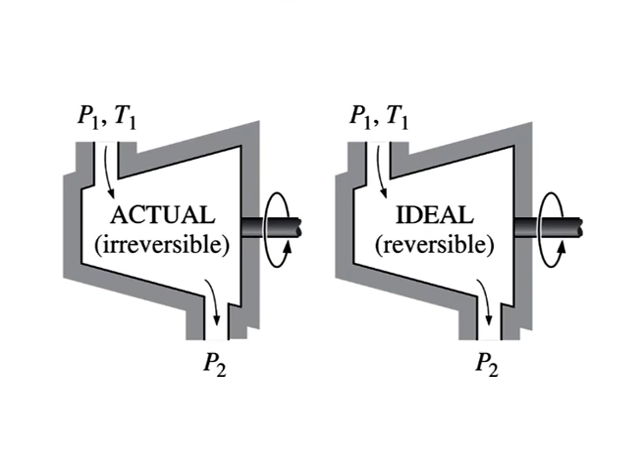Furthermore, an ideal process should involve no irreversibilities, since the effect of irreversibilities is always to downgrade the performance of engineering devices. Thus, the ideal process that can serve as a suitable model for adiabatic steady flow devices is the isentropic process. The more closely the actual process approximates the idealized isentropic process, the better the device performs.

Thus, it would be desirable to have a parameter that expresses quantitatively how efficiently an actual device approximates an idealized one. This parameter is the isentropic or adiabatic efficiency, which is a measure of the deviation of actual processes from the corresponding idealized ones. Isentropic efficiencies are defined differently for different devices, since each device is set up to perform different tasks.

Isentropic efficiency of turbines. For a turbine under steady operation, the inlet state of the working fluid and the exhaust pressure are fixed. Therefore, the ideal process for an adiabatic turbine is an isentropic process between the inlet state and the exhaust pressure. The desired output of a turbine is the work produced,

and the isentropic efficiency of a turbine is defined as the ratio of the actual work output of the turbine to the work output that would be achieved if the process between the inlet state and the exit pressure were isentropic, that is, eta T is equal to actual turbine work divided by isentropic turbine work, and is equal to W A upon W S.

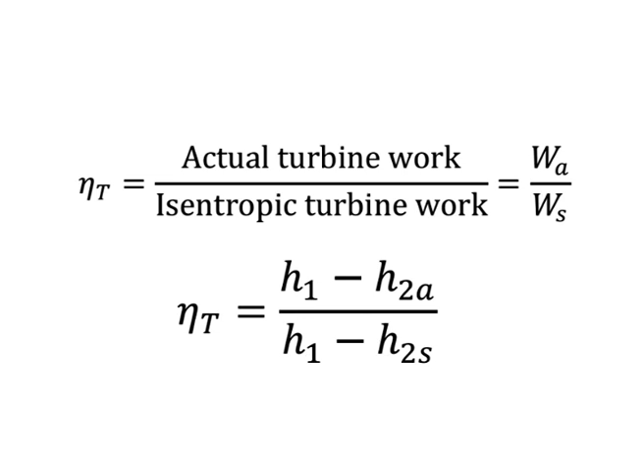The value of eta T greatly depends on the design of the individual components that make up the turbine. Well designed large turbines have isentropic efficiencies above 90%. For small turbines, however, it may drop even below 70%.

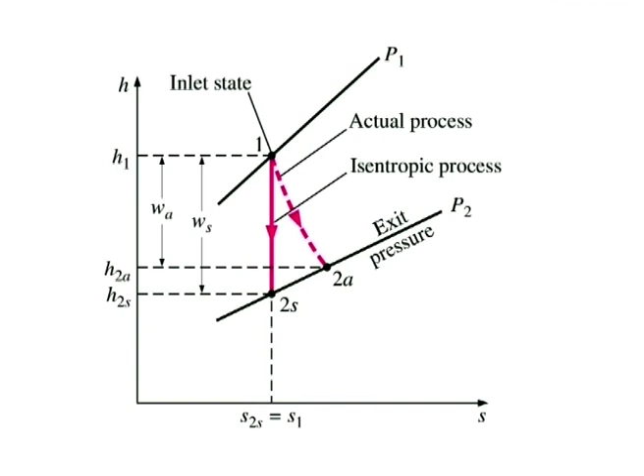The value of the isentropic efficiency of a turbine is determined by measuring the actual work output of the turbine and by calculating the isentropic work output for the measured inlet conditions and the exit pressure. This value can be used conveniently in the design of power plants.

Isentropic efficiencies of compressors and pumps. The isentropic efficiency of a compressor is defined as the ratio of the work input required to raise the pressure of a gas to a specified value in an isentropic manner to the actual work input, that is, eta C is equal to isentropic compressor work divided by actual compressor work, and is equal to Ws upon Wa.

Notice that the isentropic compressor efficiency is defined with the isentropic work input in the numerator instead of the denominator. This is because Ws is a smaller quantity than Wa, and this definition prevents eta C from becoming greater than 100%, which would falsely imply that the actual compressors performed better than the isentropic ones.

When the changes in kinetic and potential energies of the gas being compressed are negligible, the work input to an adiabatic compressor becomes equal to the change in enthalpy, and the above equation for this case becomes eta C is equal to H2S minus H1 divided by H2A minus H1.

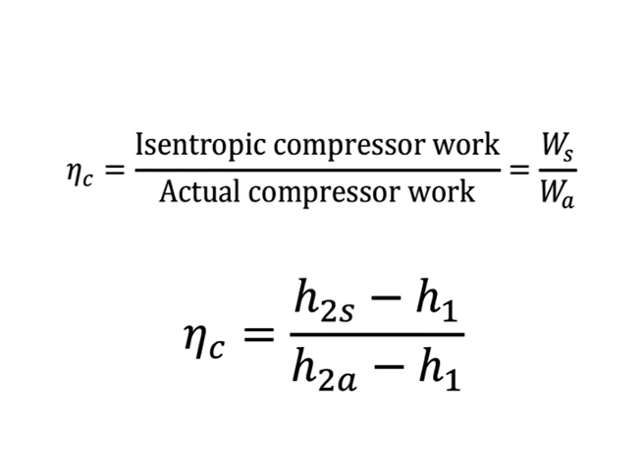Here H2A and H2S are the enthalpy values at the exit state for actual and isentropic compression processes respectively, as illustrated in this figure. The value of eta C greatly depends on the design of the compressor. Well designed compressors have isentropic efficiencies that range from 80 to 90%.

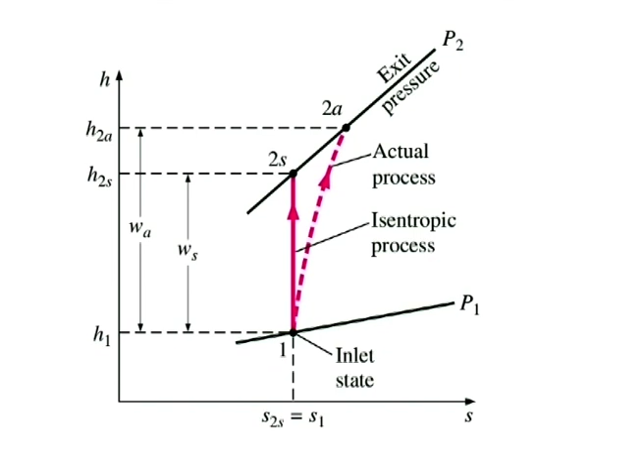When the changes in potential and kinetic energies of a liquid are negligible, the isentropic efficiency of a pump is defined similarly as eta C equals Ws upon Wa, equal to V times (P2 minus P1) divided by (H2A minus H1).

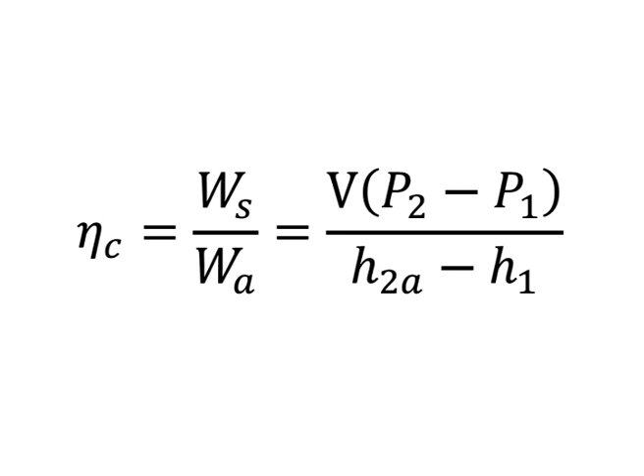When no attempt is made to cool the gas as it is compressed, the actual compression process is nearly adiabatic, and the reversible adiabatic, that is isentropic, process serves well as the ideal process. However, sometimes compressors are cooled intentionally using fins or water jackets around the casing to reduce work input requirements. In this case, the isentropic process is not suitable as a model, since the device is no longer adiabatic and the isentropic compressor efficiency as defined is meaningless.

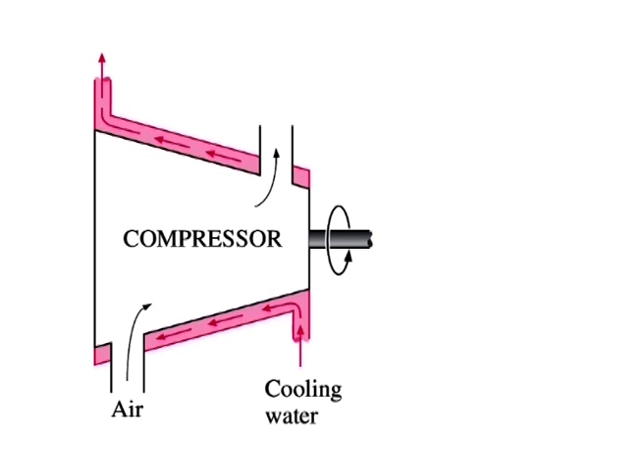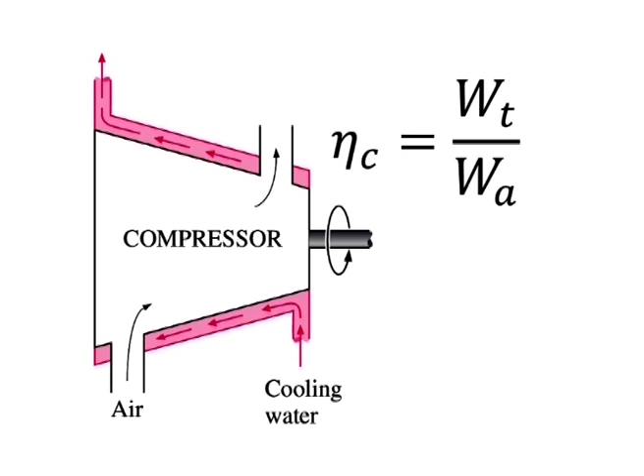A realistic model process for compressors that are intentionally cooled during compression is the reversible isothermal process. We can then conveniently define an isothermal efficiency for such cases by comparing the actual process to a reversible isothermal one, as eta C equals Wt upon Wa. Here Wt and Wa are the required work inputs to the compressor for the reversible isothermal and actual cases respectively.

Isentropic efficiency of nozzles. Nozzles are essentially adiabatic devices used to accelerate a fluid. Therefore, the isentropic process serves as a suitable model for nozzles.

The isentropic efficiency of a nozzle is defined as the ratio of the actual kinetic energy of the fluid at the nozzle exit to the kinetic energy value at the exit of an isentropic nozzle for the same inlet state and exit pressure. That is, eta n equals actual kinetic energy at nozzle exit divided by isentropic kinetic energy at nozzle exit, equal to V squared 2A divided by V squared 2S.

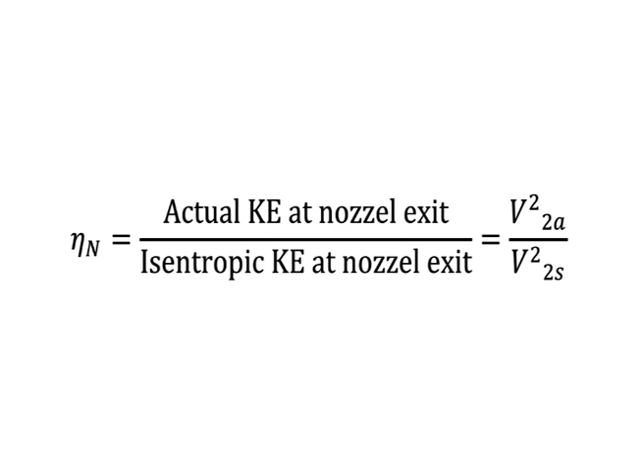Note that the exit pressure is the same for both the actual and isentropic processes, but the exit state is different. Nozzles involve no work interactions, and the fluid experiences little or no change in its potential energy as it flows through the device.

If, in addition, the inlet velocity of the fluid is small relative to the exit velocity, the energy balance for this steady flow device reduces to H1 equals H2A plus V squared 2A divided by 2. Then the isentropic efficiency of the nozzle can be expressed in terms of enthalpies as eta n approximately equals (H1 minus H2A) divided by (H1 minus H2S).

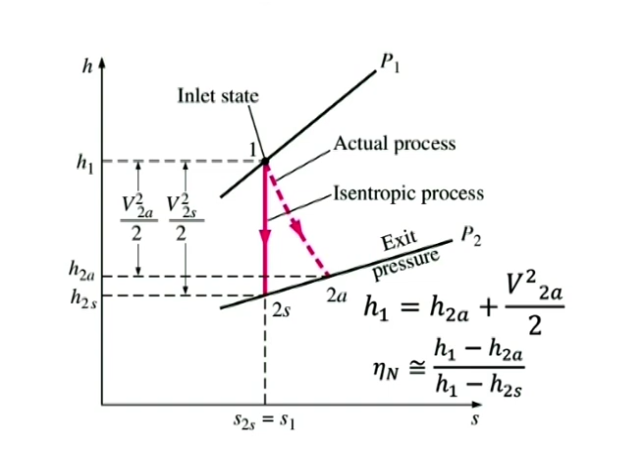Here H2A and H2S are enthalpy values at the nozzle exit for the actual and isentropic processes respectively. Isentropic efficiencies of nozzles are typically above 90%, and nozzle efficiencies above 95% are not uncommon.

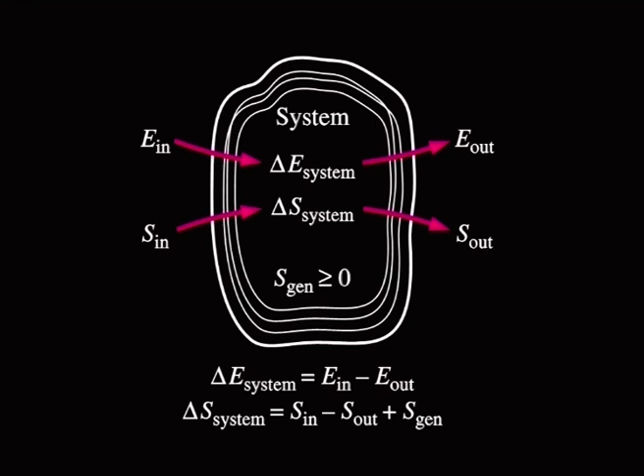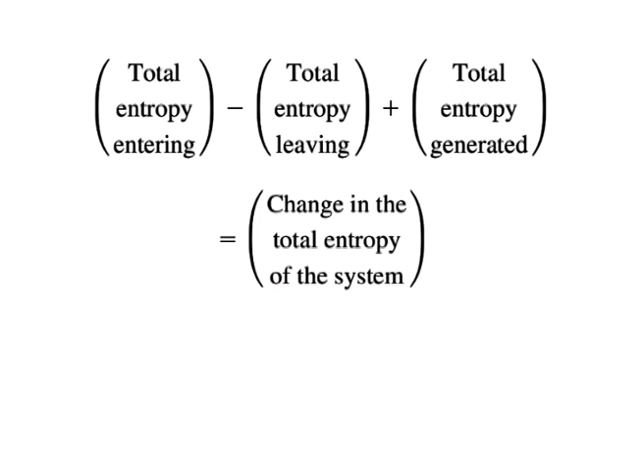Entropy balance. The property entropy is a measure of molecular disorder or randomness of a system, and the second law of thermodynamics states that entropy can be created but it cannot be destroyed. Therefore, the entropy change of a system during a process is greater than the entropy transfer by an amount equal to the entropy generated during the process within the system. The increase of entropy principle for any system is expressed as total entropy entering minus total entropy leaving plus total entropy generated equals the change in total entropy of the system, or S in minus S out plus S generated equals delta S system.

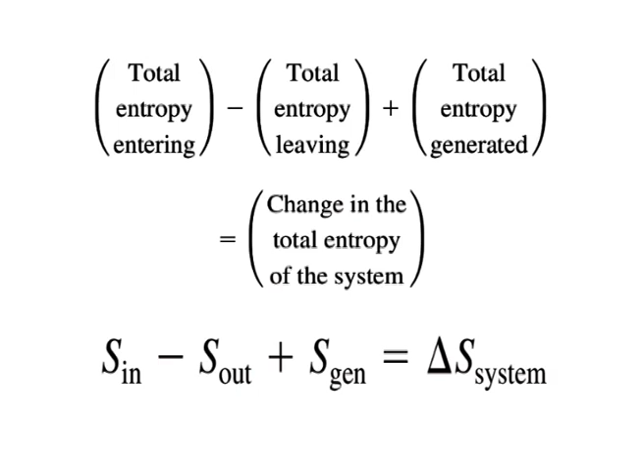This relation is often referred to as the entropy balance and is applicable to any system undergoing any process. It can be stated as: the entropy change of a system during a process is equal to the net entropy transfer through the system boundary plus the entropy generated within the system.

Entropy change of a system. Despite the reputation of entropy as being vague and abstract, and the intimidation associated with it, entropy balance is actually easier to deal with than energy balance, since unlike energy, entropy does not exist in various forms.

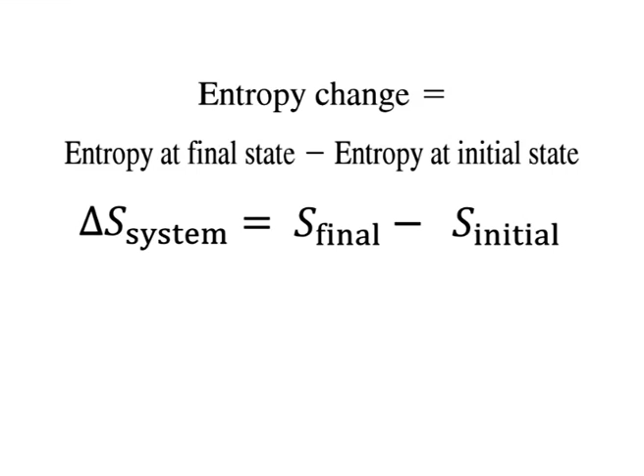Therefore, determining the entropy change of a system during a process involves evaluating the entropy of the system at the beginning and at the end of the process and taking their difference. That is, entropy change equals entropy at final state minus entropy at initial state, or delta S system equals S final minus S initial, equal to S2 minus S1.

Note that entropy is a property, and the value of a property does not change unless the state of the system changes. Therefore, the entropy change of a system is zero if the state of the system does not change during the process. For example, the entropy change of steady flow devices such as nozzles, compressors, turbines, pumps and heat exchangers is zero during steady operation.

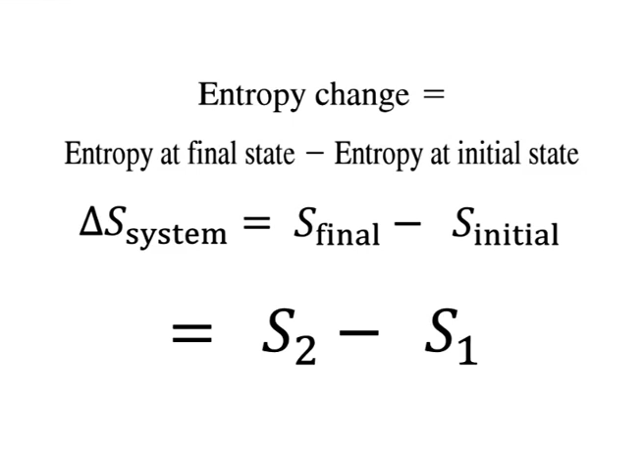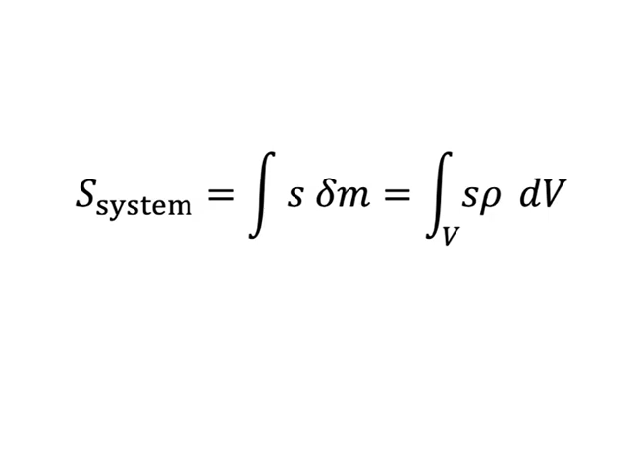When the properties of the system are not uniform, the entropy of the system can be determined by S system equals the integral of S delta m, equal to the integral of S rho dV over V. Here V is the volume of the system and rho is the density.

Mechanisms of entropy transfer. Entropy can be transferred to or from a system by two mechanisms: heat transfer and mass flow. Entropy transfer is recognized at the system boundary as it crosses the boundary, and it represents the entropy gained or lost by a system during a process. The only form of entropy interaction associated with a fixed mass or closed system is heat transfer, and thus the entropy transfer for an adiabatic closed system is zero.

Heat transfer. Heat is in a sense a form of disorganized energy, and some disorganization will flow with heat. Heat transfer to a system increases the entropy of that system and thus the level of molecular disorder or randomness, and heat transfer from a system decreases it. In fact, heat rejection is the only way the entropy of a fixed mass can be decreased.

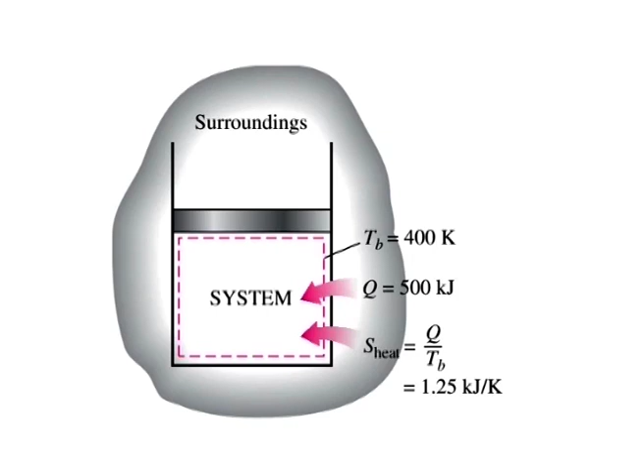The ratio of the heat transfer Q at a location to the absolute temperature T at that location is called the entropy flow or entropy transfer and is expressed as S heat equals Q upon T. Here T is a constant. The quantity Q upon T represents the entropy transfer accompanied by heat transfer, and the direction of entropy transfer is the same as the direction of heat transfer, since thermodynamic temperature T is always a positive quantity.

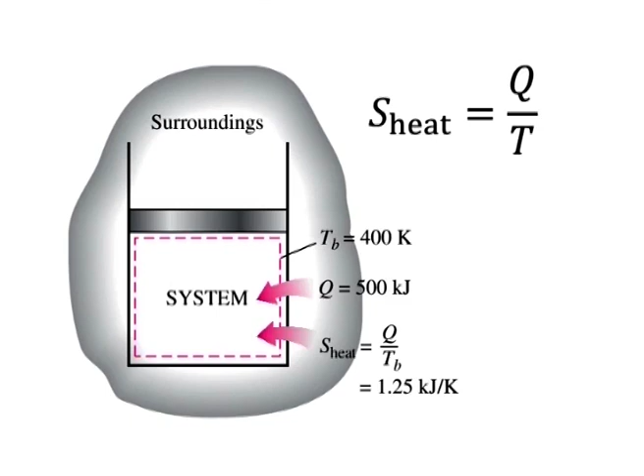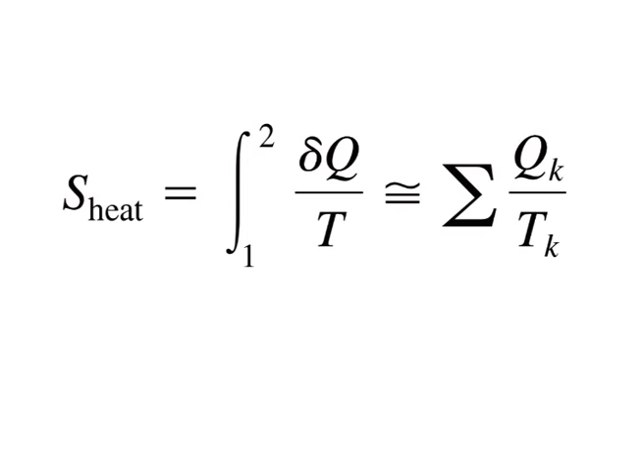When the temperature T is not constant, the entropy transfer during a process can be determined by integration as S heat equals integral of delta Q upon T from 1 to 2, and is approximately equal to summation of Qk upon Tk. Here Qk is the heat transfer through the boundary at temperature Tk at location k.

When two systems are in contact, the entropy transfer from the warmer system is equal to the entropy transfer into the cooler one at the point of contact. That is, no entropy can be created or destroyed at the boundary, since the boundary has no thickness and occupies no volume. Note that work is entropy free and no entropy is transferred by work.

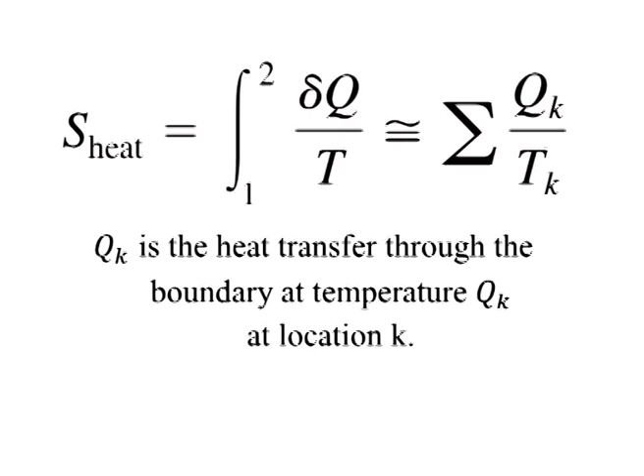Energy is transferred by both heat and work, whereas entropy is transferred only by heat, that is, S work equals zero. The first law of thermodynamics makes no distinction between heat transfer and work. It considers them equal. The distinction between heat transfer and work is brought out by the second law.

An energy interaction that is accompanied by entropy transfer is heat transfer, and an energy interaction that is not accompanied by entropy transfer is work. That is, no entropy is exchanged during a work interaction between a system and its surroundings. Thus, only energy is exchanged during work interaction, whereas both energy and entropy are exchanged during heat transfer.

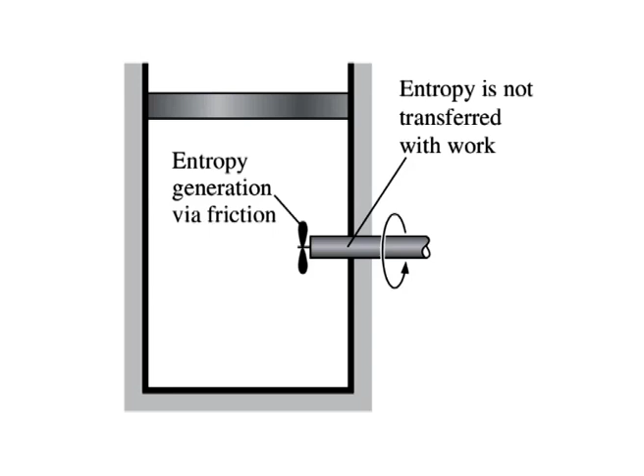Mass flow. Mass contains entropy as well as energy, and the entropy and energy contents of a system are proportional to the mass. Both entropy and energy are carried into or out of a system by streams of matter, and the rates of entropy and energy transport into or out of the system are proportional to the mass flow rate.

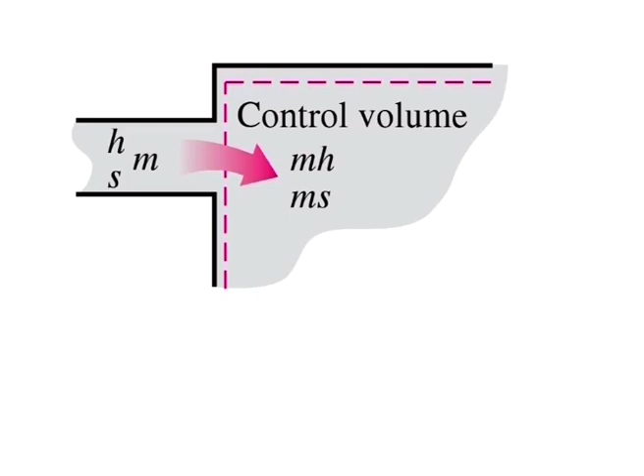Closed systems do not involve any mass flow and thus any entropy transfer by mass. When a mass in the amount of m enters or leaves a system, entropy in the amount of ms accompanies it. Here s is the specific entropy, entropy per unit mass entering or leaving. So, S mass equals m into s.

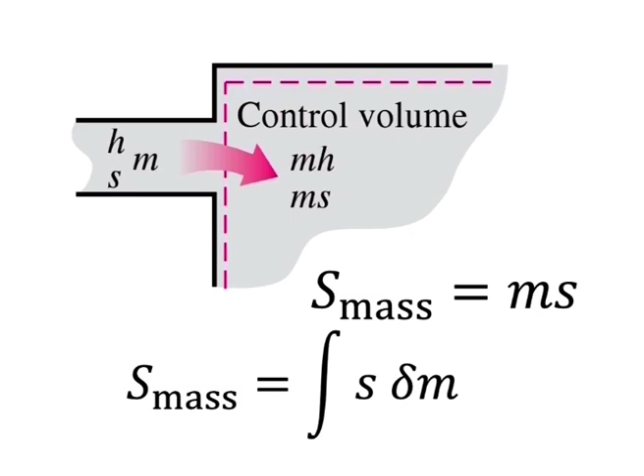Therefore, the entropy of a system increases by ms when mass in the amount of m enters, and decreases by the same amount when the same amount of mass at the same state leaves the system. When the properties of the mass change during the process, the entropy transfer by mass flow can be determined by integration as S mass equals integral of s delta m.

So friends, here we come to the end of our discussion in today's lecture, and therefore we sum up. The work done during a steady flow process is proportional to the specific volume. Therefore, it should be kept as small as possible during a compression process to minimize the work input, and as large as possible during an expansion process to maximize the work output.

Most steady flow devices operate under adiabatic conditions, and the ideal process for these devices is the isentropic process. The parameter that describes how efficiently a device approximates a corresponding isentropic device is called isentropic or adiabatic efficiency.